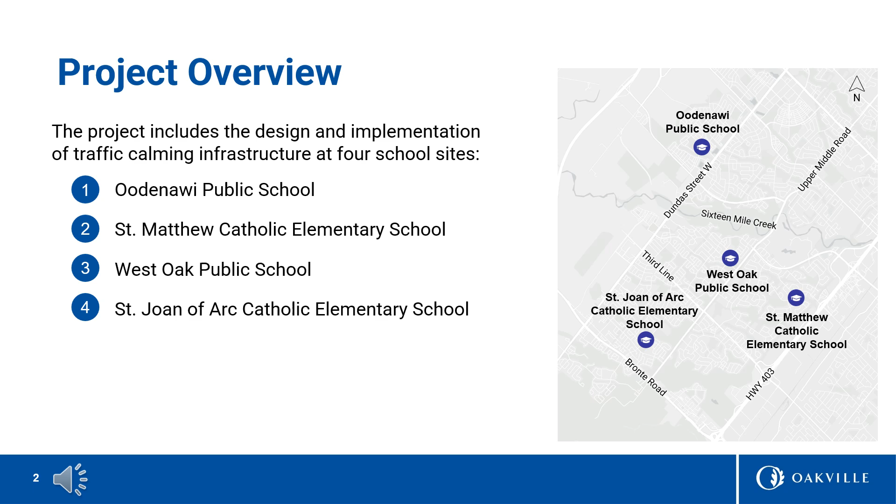This project includes the design and implementation of traffic calming infrastructure at 4 school sites: Oodenawi Public School, St. Matthew Catholic Elementary School, West Oak Public School, and St. Joan of Arc Catholic Elementary School. The map on this slide illustrates the locations of the 4 school sites.

This slide shows a more detailed look at the project boundaries for each school site. At Oodenawi Public School, the project boundary is along 16 Mile Drive between Harebell Gate and Trailside Drive. At St. Matthew Catholic Elementary School, the town is exploring measures along Nottinghill Gate between Pilgrim's Way and Runnymede Crescent. At West Oak Public School along 4th Line between Glen Valley Road and Westview Terrace/Brillinger Street, and at St. Joan of Arc Catholic Elementary School along Westoak Trails Boulevard between Callaway Drive and Ashmore Drive.

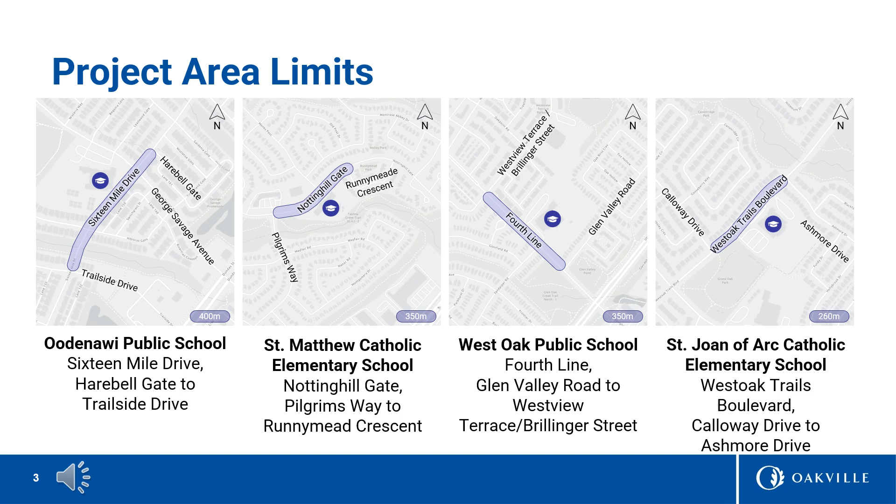Local policies and plans demonstrate significant support for traffic calming and roadway safety. For example, one of the key planning goals from the town's Transportation Master Plan is to provide a safe and efficient transportation system for all road users. The town currently has various initiatives to improve traffic safety under the Neighbourhood Traffic Safety Program noted in this plan, including education and outreach, network screening, and crossing guard programs.

The town's Active Transportation Master Plan focuses on people walking and cycling and emphasizes the need to accommodate pedestrians and cyclists on every street, which includes supporting active school travel. The town also recognizes the emerging Vision Zero philosophy that is gaining momentum worldwide for eliminating traffic fatalities and severe injuries among all road users by providing safe, healthy, and equitable mobility for all. Vision Zero embraces the philosophy that all traffic deaths are preventable, and it is a shared responsibility amongst policymakers and designers to ensure a safe system for all road users.

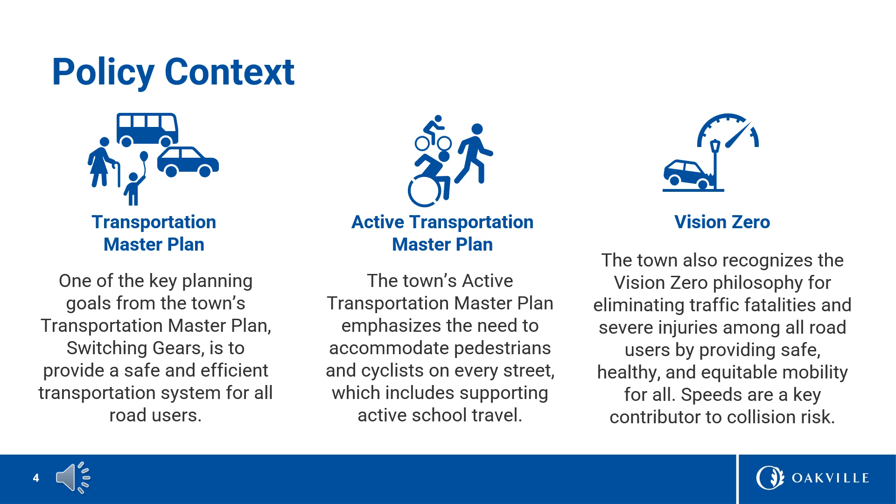Motor vehicle speeds are a key contributor to injuries and deaths on the road network. Traffic calming and measures that reduce operating speeds help reduce the severity of collisions, enhancing safety, particularly for vulnerable road users. In response to the policy support for traffic calming, the Town of Oakville operates a neighbourhood traffic safety program with 6 key components: traffic calming, pedestrian crossovers, community safety zones, automated speed enforcement, reduced default speed limit, and Vision Zero.

In 2018, the town initiated a study of traffic calming measures that could be implemented along major collector and minor arterial roadways in school zones. Many traffic calming measures have limited applications along major collector and minor arterial roadways, and emerging traffic calming measures require consideration in these contexts. Through that study, new traffic calming measures were added to the town's toolbox and functional designs were developed across 20 school sites. 4 school sites have been identified for follow-up and implementation of traffic calming measures at this time. Traffic calming at additional schools will be reviewed.

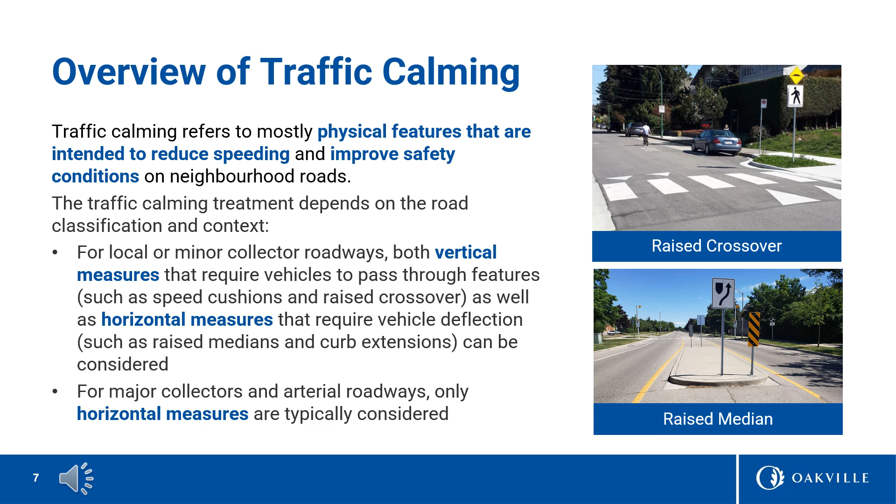So what is traffic calming? Traffic calming is a term used to describe a combination of mostly physical features that are intended to reduce speeding on neighbourhood roads and improve safety conditions for everyone who uses the road. The traffic calming treatment available for a road depends on the classification and context of the road. For local or minor collector roadways, both vertical measures that require vehicles to traverse features such as speed cushions and raised crossovers, as well as horizontal measures that require vehicle deflection, such as raised medians and curb extensions, can be considered. Examples of raised crossovers and raised median treatments in Oakville are shown on this slide. For major collector and arterial roadways, only horizontal measures are typically considered.

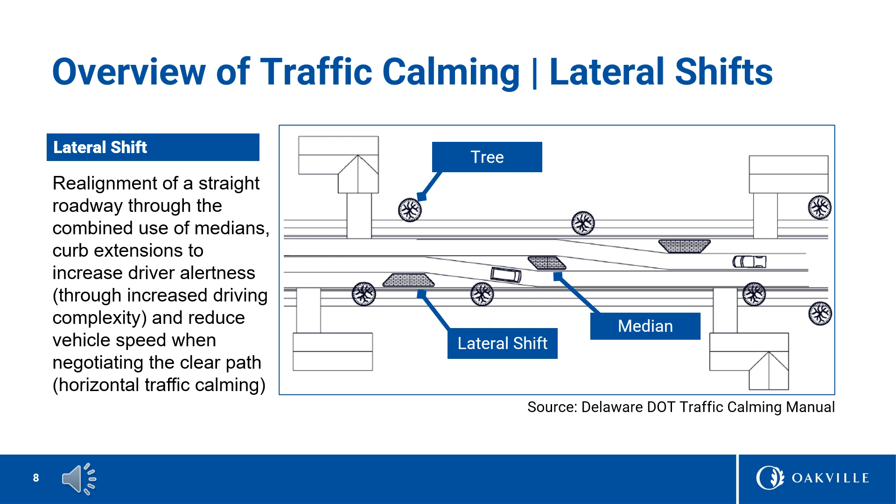As part of this project, several new horizontal traffic calming measures are being considered. One of those measures is a lateral shift. A lateral shift is a realignment of a straight roadway through the combined use of medians and curb extensions to increase driver alertness through increased driving complexity and reduce vehicle speed when navigating the clear path. Lateral shifts are a form of horizontal traffic calming that can help to reduce speeding while minimizing overall operational impacts, and are easier to maintain and install. These measures are appropriate across a wide variety of roadway contexts.

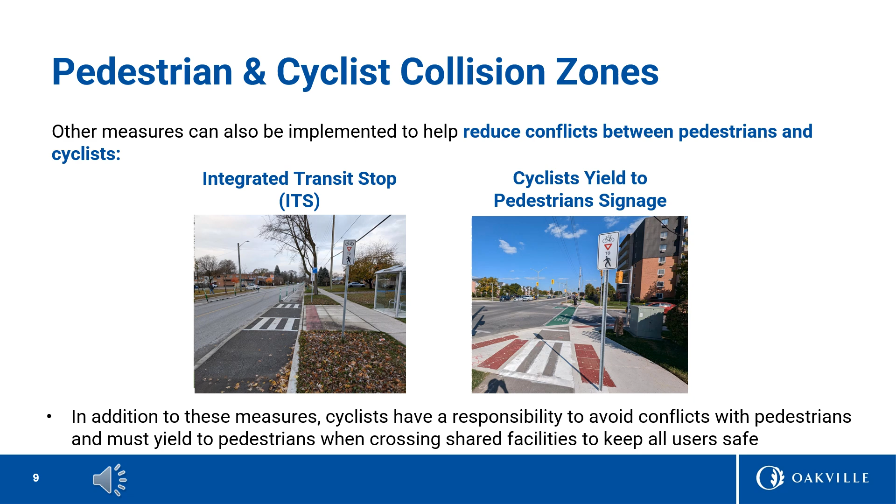In addition to traffic calming measures, there are several other types of measures that can be implemented along roadways to improve safety for vulnerable road users. The town is exploring additional measures to help reduce conflicts between pedestrians and cyclists, such as integrated transit stops and signage to indicate that cyclists must yield to pedestrians. These measures are specifically being proposed for the St. Matthew and St. Joan of Arc school sites.

The town explored several potential configurations of traffic calming measures at each school site. For Oodenawi Public School along 16 Mile Drive, the town explored raised medians throughout the corridor, a lateral shift on the north side and south side, mid-block curb extensions on the south side at 16 Mile Drive and Hibiscus Gardens, and ladder crossings at the intersection of 16 Mile Drive and George Savage Avenue.

At the St. Matthew school site along Nottinghill Gate, the town reviewed the existing north median and bollards to determine impacts to transit and potential alternatives. The town also considered extending the southmost median farther north, as well as a curb extension, lateral shift, or similar measure at Nottinghill Gate and Monk's Pass, and a raised center median south of Runnymede Crescent.

For West Oak Public School along 4th Line, the town explored improvements to the pedestrian crossing at the Sandpiper Road or South School driveway entrance, including a sidewalk connection from the crossings at the east side of 4th Line. The town also explored adding ladder crossings at the intersection of 4th Line and Sandpiper Road and 4th Line and Glen Valley Road.

Finally, at the St. Joan of Arc school site along Westoak Trails Boulevard, the town explored location options for one or more raised center medians, as well as a potential location for a lateral shift on the north side of Westoak Trails Boulevard.

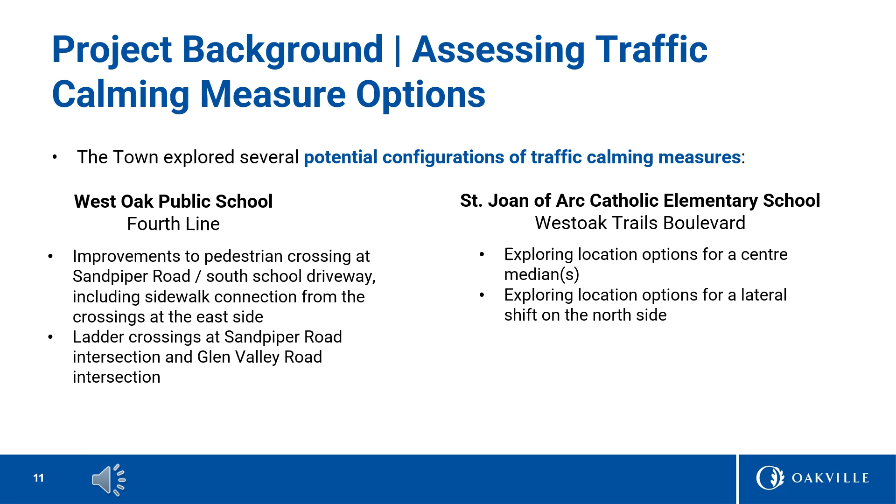To review the potential traffic calming measures outlined in the previous slides, the town conducted a number of technical investigations to understand impacts to safety, traffic, and parking. This section of the presentation will cover the proposed design changes at Oodanawe Public School.

Several options were considered for 16 Mile Drive at Oodenawi Public School. While a central median would likely help reduce speeds along the corridor, its effectiveness is dependent on continuous parking use on both sides of the roadway to help visually narrow the driving lanes. Currently, parking on the east side of 16 Mile Drive has a higher usage rate than the west side, as per the town's observations.

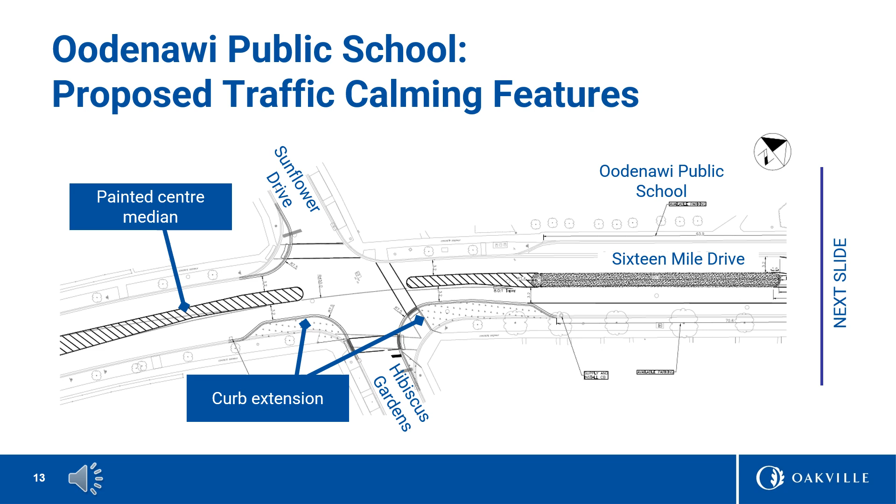Curb extensions are proposed on the southeast and southwest corners of the intersection of 16 Mile Drive and Sunflower Drive/Hibiscus Gardens. The curb extensions are intended to reduce northbound vehicle speeds and turning traffic from Hibiscus Gardens. Furthermore, the southwest corner radius has been updated to make eastbound turns smoother for vehicles turning from Sunflower Drive onto 16 Mile Drive. Lastly, the existing curve through the intersection has been redefined to clearly delineate the traffic calming measures.

A southbound lateral shift is proposed south of George Savage Avenue. Each lateral shift is designed according to the speed limit, accounting for both school and transit buses. This pinch point will help reduce vehicle speeds on both sides of 16 Mile Drive.

To maintain parking along the East Boulevard, the design proposes a single curb extension within the northbound parking lane. The position of this curb extension works in conjunction with the lateral shift of the oncoming traffic. Ladder markings are also proposed at all crossings at the intersection of 16 Mile Drive and George Savage Avenue to improve safety and visibility for pedestrians.

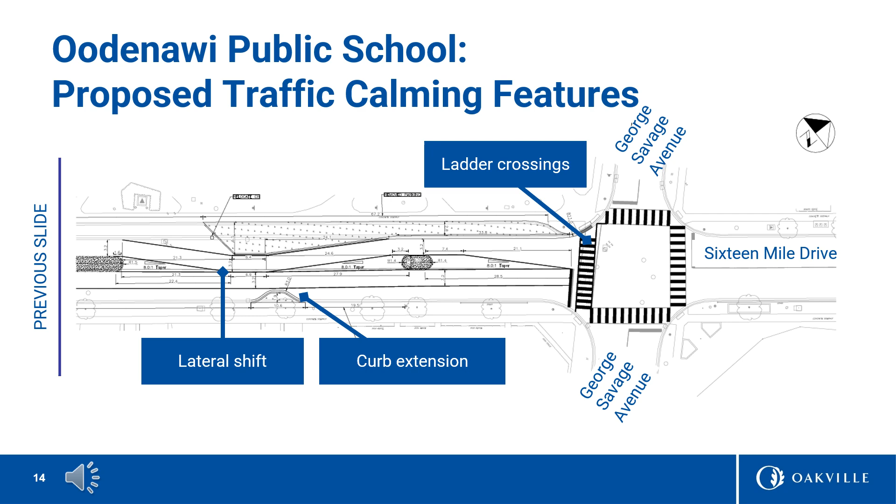This section of the presentation will cover the proposed design changes at St. Matthew Catholic Elementary School. The design proposes raised center medians along Nottinghill Gate fronting the school to help slow vehicle speeds. An integrated transit stop is also proposed on the north and south sides of Nottinghill Gate.

Just east of Pilgrims Way, this helps reduce collisions between pedestrians entering and exiting transit buses and cyclists traveling in the cycle track. The raised transit stops also help reinforce the reduced driving lane width when combined with the central median.

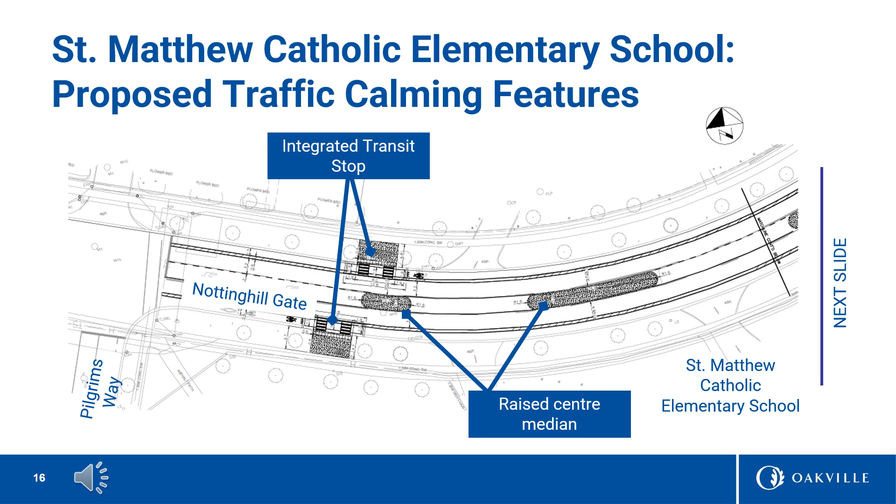Also fronting the school, the bicycle lane and school driveway access have been raised to improve safety and visibility for vulnerable road users. The design also includes an eastbound lateral shift in this location to increase driver alertness and reduce speeds near the school site and the pedestrian crossing.

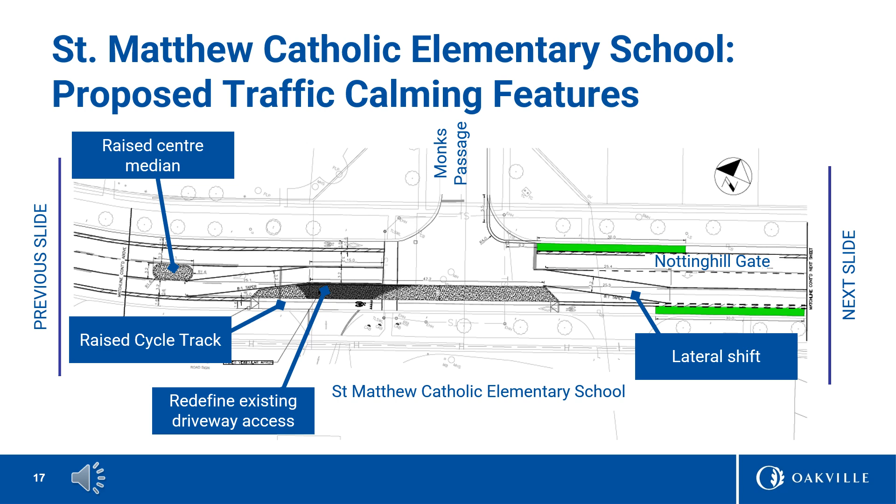Finally, an additional raised center median is proposed just west of Runnymede Crescent.

This section of the presentation will cover the proposed design changes at West Oak Public School. At West Oak Public School, ladder pavement markings are proposed for each of the crossings at the intersection of 4th Line and Westview Terrace/Brillinger Street.

The design also includes an eastbound lateral shift between Westview Terrace/Brillinger Street and Sandpiper Road with a curb extension and raised center median to help promote speed reduction.

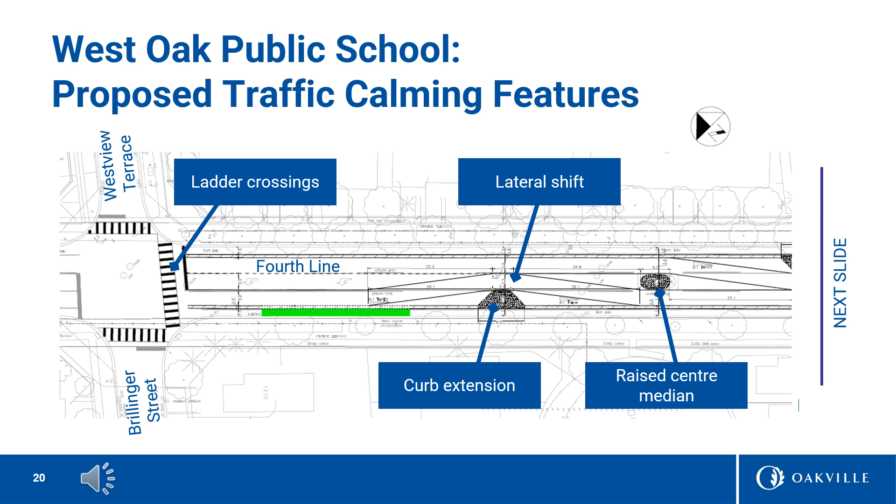Continuing south along the corridor, an eastbound lateral shift is proposed, also with a curb extension and raised center median just north of Sandpiper Road.

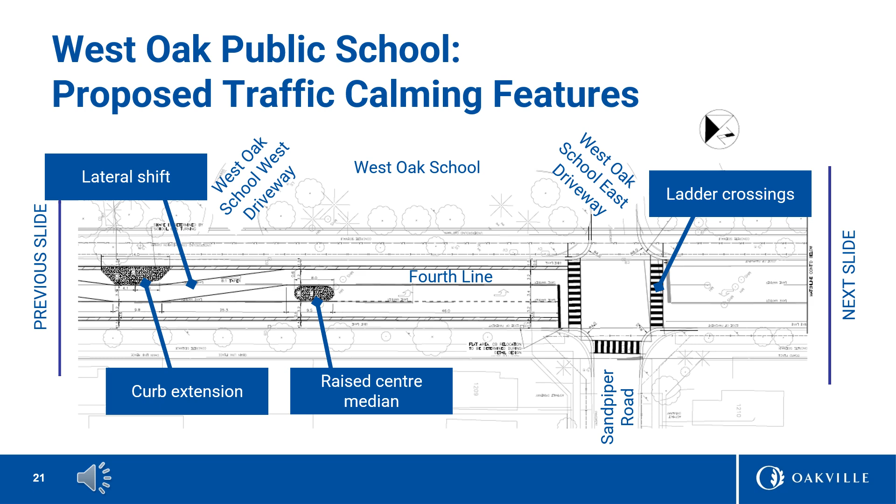Intersection improvements are included at the intersection of 4th Line and Sandpiper Road to improve safety for pedestrians. These improvements include reduced curb radii, ladder markings, and defined sidewalk connections at the school entrance. An additional ladder crossing is also proposed at the intersection of 4th Line and Glen Valley Road.

This section of the presentation will cover the proposed design changes at St. Joan of Arc Catholic Elementary School.

Looking at the St. Joan of Arc Catholic Elementary School site, several measures are proposed directly fronting the school. These measures include a northbound lateral shift with a curb extension and a raised center median to once again help reduce speeds and increase driver alertness.

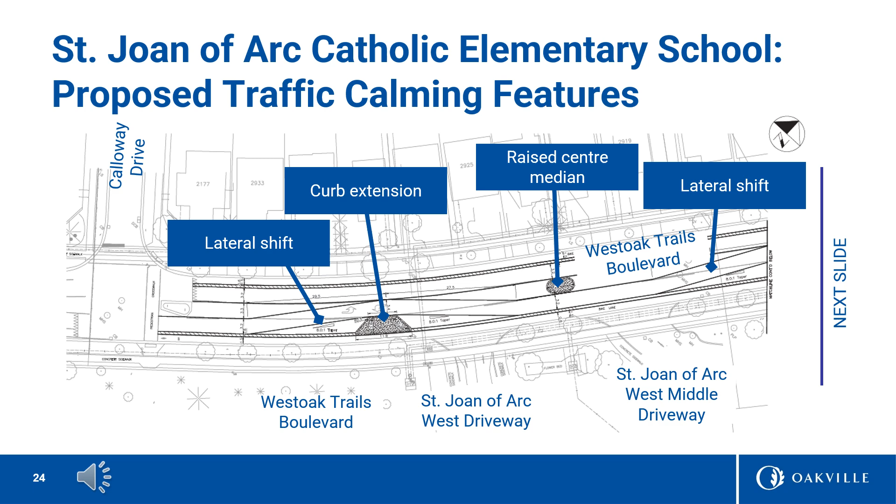Finally, a second northbound lateral shift is proposed at the crossing location to further encourage slower speeds and reduce crossing distances for pedestrians. This includes a raised median near the St. Joan of Arc West middle driveway, with the addition of ladder pavement markings to facilitate a safer and more visible crossing opportunity in front of the school. This location will be monitored and controlled by a crossing guard.